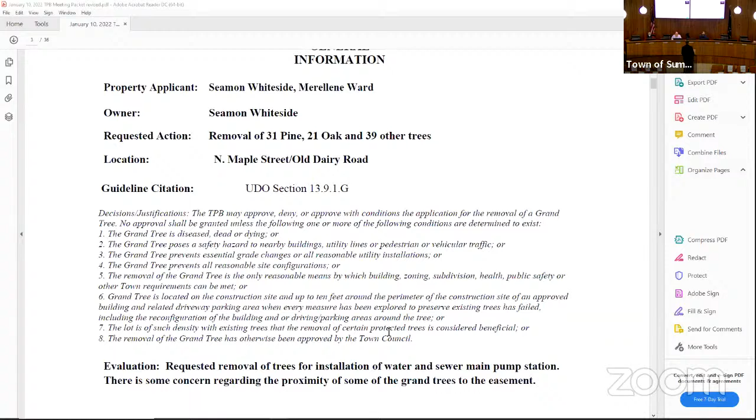Bill, you want to give your assessment on this project and what you've seen with the trees? Yes, I've worked with Chris a good little bit on it. I've been out in the field with him, and we graded all the grand trees that were in this easement. He did a real good job trying to save what he could, and he moved it around so he could miss some of them and take out trees that already had problems.

There's a few areas where we were getting into the drip line of a few of them, but he talked to y'all about that over there on Thursday. And as I understand it, it meets the PUD agreement that was signed. Yes, I looked to check that.

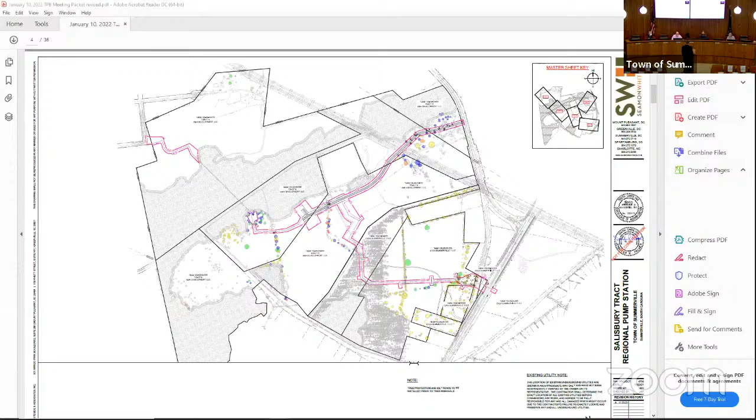We'll be asking for some type of mitigation efforts to protect the root system, in two places. Anywhere it's getting into the drip line of those trees, they're going to have to come up with a mitigation plan, and there were only two principal places. There was the one where the initial road comes in and bisects two clumps of live oak, and the second was where it was a stub for a sewer line.

We wanted some satisfaction on what the degree of disturbance was going to be, because it was pretty close to moving that live oak. We'll keep an eye on that as they put up tree protection, and they'll have to put all the tree protection up before they do any of this.

And just for discussion's sake, there is a portion of that project where there are pine trees that are part of a silviculture exemption. That's correct, yes. And they're going to bore all the way underneath that wetland, so they're not going to disturb any of those trees in the wetland.

So do you have further discussion, or are you content to? I'm pretty content with it all.

Is there a motion that we made on this, or we simply? No, we haven't made a motion yet, just discussion's sake. If anybody has a motion, I think we were out there, all four of us visited the site and spent a good bit of time looking at the project as a whole.

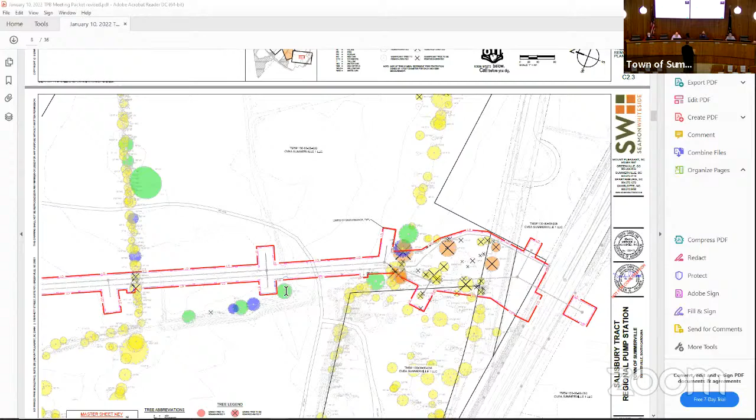That was easy. Fantastic. That's it. Thank you very much. Thank you.

All right, second new business, 201 West 9th North Street, Unit 312, removal of one pine and three gums. Is there anybody here representing that property?

All right, Bill, we all saw it, but you want to give your assessment? It was on that one real big pine tree. I guess the biggest thing we were looking at was where they were doing the plumbing work inside and had cut the slab up, and all the roots that were underneath the slab. The trees are healthy that are back there, but I guess that's their problem. They're too healthy and they're growing roots all the way underneath that slab.

You can see a lot of surface roots heading back towards the building, particularly with, and only really with, the sweet gum cluster, not with the big pine. Yeah, the roots did look like sweet gum roots inside there. You said they did or did not? They did look more like sweet gum roots, the ones that they had dug up.

But it wasn't anything cracking that we could see anywhere, where anything had cracked on the slab. I was concerned about the possibility of that tree that had already been removed, those root systems. Yeah, we don't know where those roots went. Didn't see any evidence of that one big pine tree back there, its roots growing towards the building. We didn't see any above ground roots growing back towards the building from it.

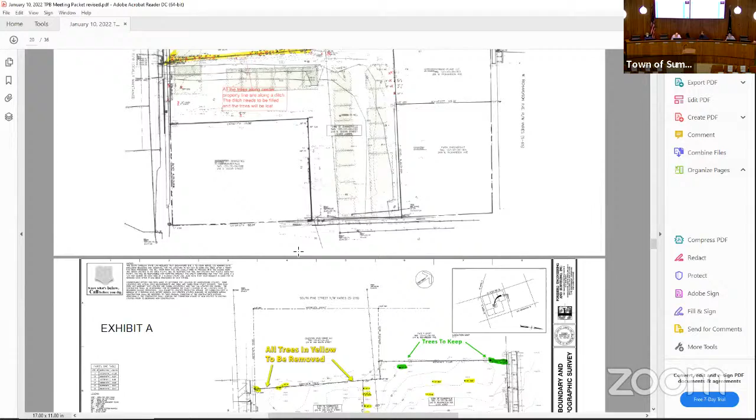So this is a more detailed site plan, shows all the trees in yellow to be removed, trees in green to keep, and then there's an area of potential soil gas caused by the former gas station that was here at 200 N. Richardson, and that's this area outlined in pink or red.

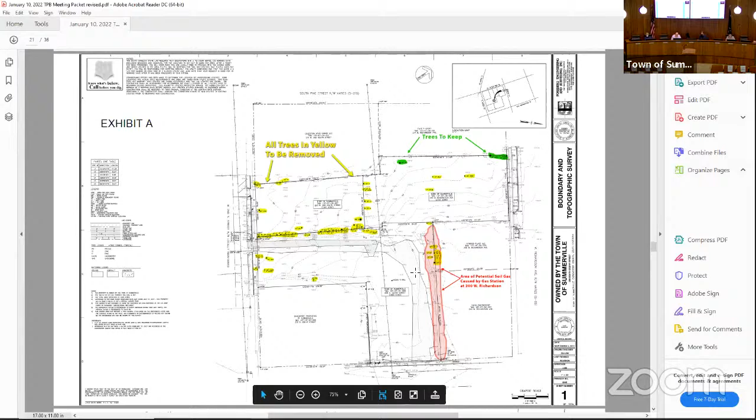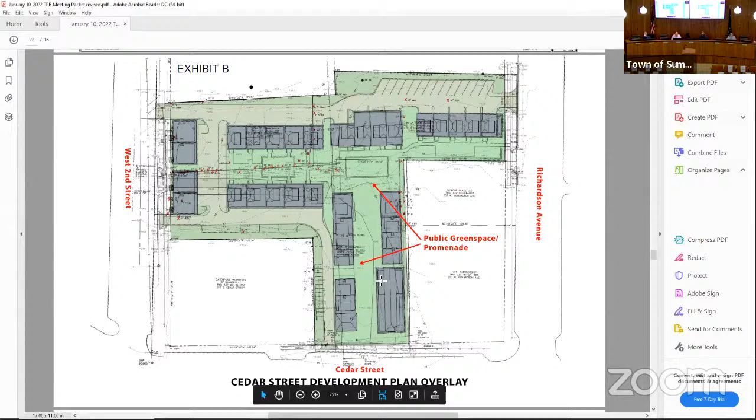They would have to answer that. I'm not sure they've gotten that far yet to have the exact surface. Is it grass, is it concrete? What is it? I'm just curious.

In the center of the promenade, Jeff Roberts assisting the town of Summerville's application. Respectfully, we're not the applicant, the town is, so we're just here to answer development questions such as this. The promenade is going to be pavers at the center. The one going horizontally will be a vegetated park, with our landscape architect providing plantings in multi-tier levels, but the promenade, similar to Short Central, will be paver. Okay, that's what I wanted to know. It'll all be perfect.

I just wondered about fire trucks driving over it. Fire trucks going over the surface?

As you said, this area here will be more of an actual park space through here. You've got an existing ditch there that will have to be filled, and the stormwater will work through that, but those trees along that ditch line obviously won't survive if the ditch is filled.

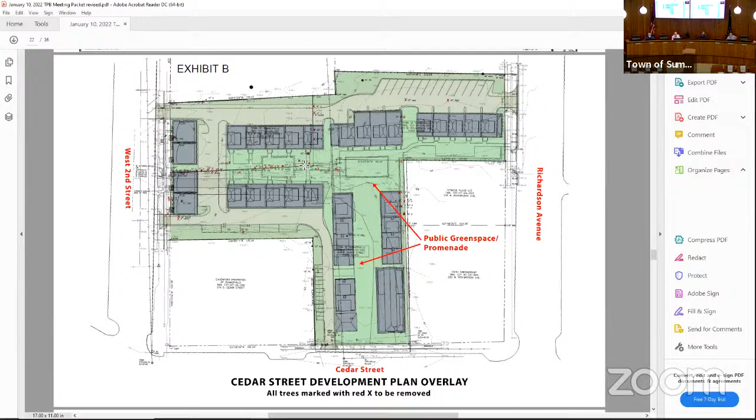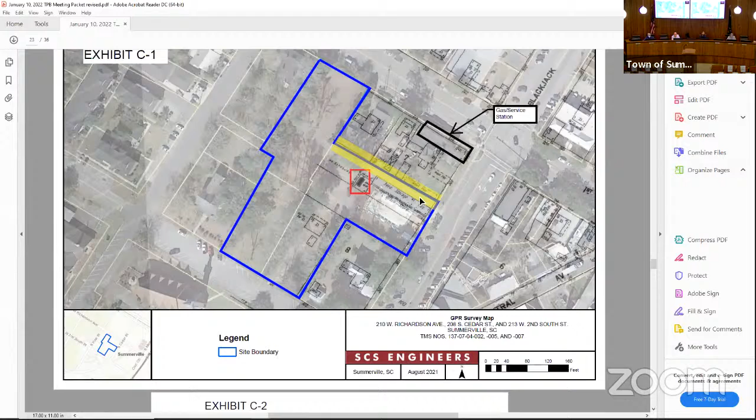This is showing the potential soil gas area. This is where the previous gas station was, at the corner of Richardson and Cedar, which at the time was known as Blackjack and First. SCS engineers did an initial survey and investigation, and found potential vapor intrusion in this area, which means the soils would need to be replaced. If you have additional questions about that, I'm sure that can be answered.

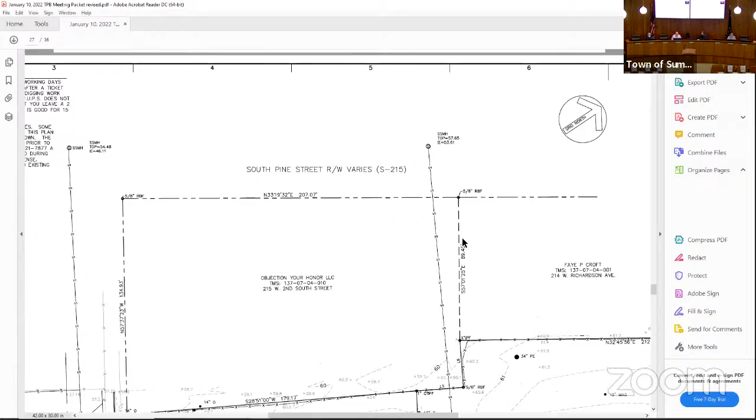Would you explain vapor intrusion? I don't know, I'm assuming there was a gas station at one time with tanks in the ground, and there's probably a plume underground. It just means the tanks most likely leaked at some point, so the soil is contaminated and has to be cleaned up before anything can be done, which means it basically has to be all excavated and replaced with soil that's not contaminated. This is done with a lot of former gas station sites, unfortunately, because previously the tanks weren't made of materials we now encase them with, but back then that wasn't done.

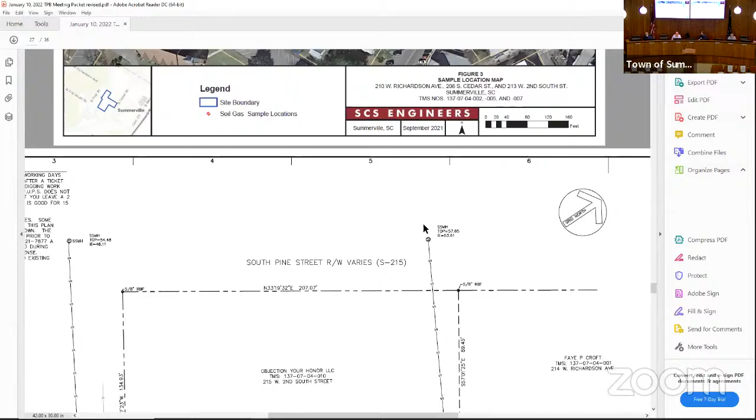Jesse, is the red square showing a tank still in the ground on that aerial picture? Is that what that is? These are soil gas sample location areas. I can assist in answering that - that was another tank from the late 1800s that we found with ground penetrating radar. That tank probably also leaked too, because the ones made subsequently were better than that tank. We can't tell if that tank's still in the ground or not, but if it is, it's got to come out, and we suspect whatever was in that tank could have leaked as well. That tank is from sometime in the 1800s.

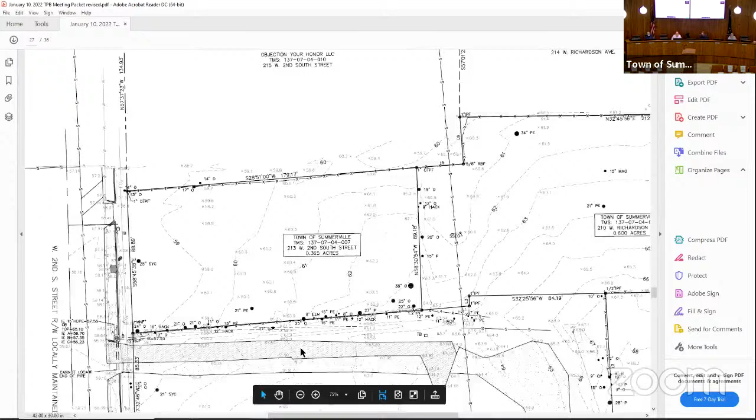This is just the overall survey of the site, which y'all have seen, but just to show the grade change they're having to work with. I believe it's about a 7-8 foot grade difference throughout the site - you've got 67 feet up here, 66 feet up here, and it goes all the way down to 59 feet over here at West 2nd South Street. That's another issue they're having to deal with that makes saving trees in the middle of the site difficult when you're dealing with that type of grade change. Most of us know we don't usually have that much grade change on a site in Summerville. Generally it's a couple feet, but 8 feet is a pretty significant difference in the low country.

Is the sidewalk level going to change? No, the sidewalk level probably won't change. However, with stormwater, they have to keep it all on site. Right now this one goes this way and this one goes this way, and they're going to have to all be routed to the same spot, to the same low point, to work properly. So it creates issues with making sure it all flows in the correct direction and not onto adjacent properties. It's all gonna head down towards the street - stormwater will be handled on site, but it'll eventually go out to, I'm assuming, the low point over here.

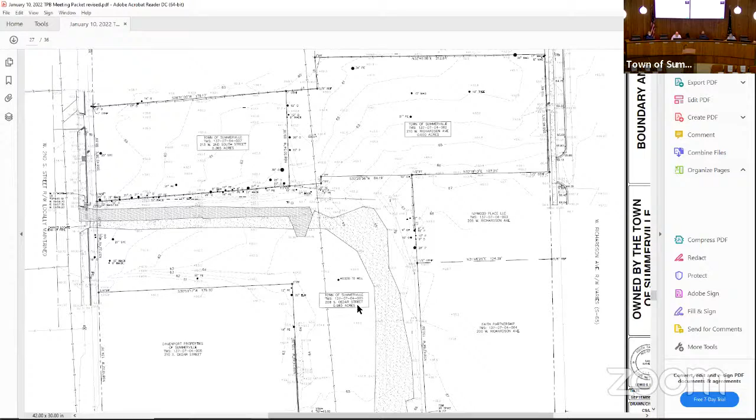Just curious, so on the page where you're showing the red area, is that dirt going to have to be removed? Excavated and removed, exhibit A? I guess the yellow and the red, yeah.

It's possible we need further testing, but we can't let a vapor plume be underneath the building. In that other page, SCS Engineers has a further proposal, but we've already gone extremely far on this project from a due diligence perspective with the town, and we definitely want to get it right. We have the top environmental engineer in the state looking at the project, working with us on all other stuff. It's possible we don't know how much has to get removed until we do additional test boring, but it's quite possible. We just can't leave vapor intrusion there for future homeowners.

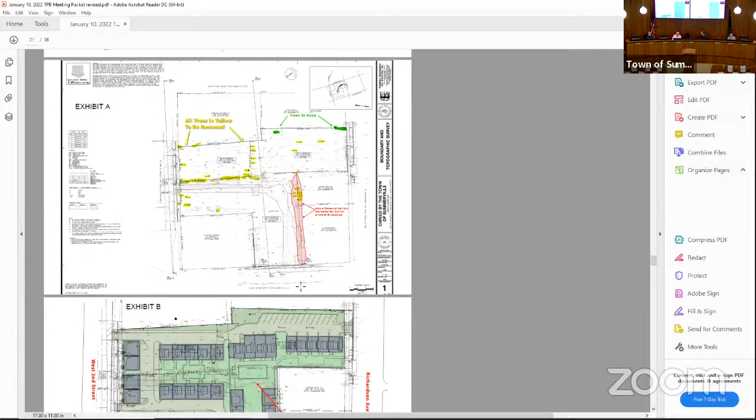For the board, the questions we had out in the field the other day, I think they've been answered by Jesse. The pine trees are at a point so close to the building that they wouldn't survive or have to come down anyway, going into the property. A couple of trees I asked about on Second Street, it appears the building is going to be pretty much in that footprint or very close to it, even though the elevation may not change. So one of the biggest things to me is protection of that big live oak adjacent to the property where the driveways could be coming. That's just a mitigation plan that'll have to be worked out.

You're right. Is that a fair statement for the board members? Yes, yes, yes. Okay, is there any more discussion or any more information? Do we have a motion?

I'll make a motion that we approve what we were requested to approve, and the trees obviously can't stay, but add particular attention to the root zone of the live oak on the adjacent property, to be dealt with as comprehensively as possible. I move that we approve the project as is with respect to the tree removal, with special attention paid to the passage of the driveway across the root zone of the neighbor's live oak. I'll second it.

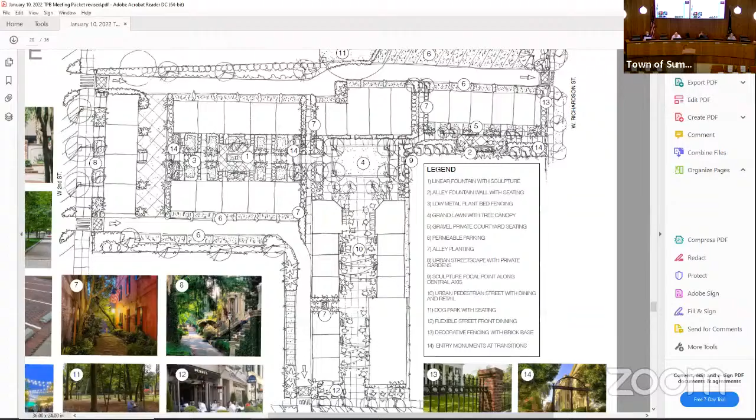You got a question? No real question. The application, the exhibit in the application where we had the arrows and everything, that's what got approved by the town, correct? Yes. Okay, yes.

And we will work hand in glove to get that live oak on the neighbor's property the royal treatment, we'll work with you. You just need to get an arborist to come in there. Oh, yeah, yeah, yeah. Give a mitigation plan. We'll work hand in glove, we got it covered. That tree will thrive. I already discussed it with our civil engineer. All right, sounds good. Thank you. Appreciate it. Thank you, appreciate it.

Thanks, all right, Jesse. All right, the last one's 110 Carroll Court, removal of 4 pine trees.

So on the property itself, this is going to be a guest house. We have a pool that was filled in on the right side of the property, and if you've been out there, you see it was a giant hump that was out there. We're looking to redo a pool out there in the coming 2 years. This is the spot on the property that, between my son-in-law who works for Pulte Homes, he's the one heading the project, this is the best spot. We had a dead pine that's pretty much already back there. And the rest of it's pretty much that. We love our property the way it is, but this is just the best feasible spot for this project. Hey, let's look at the diagram.

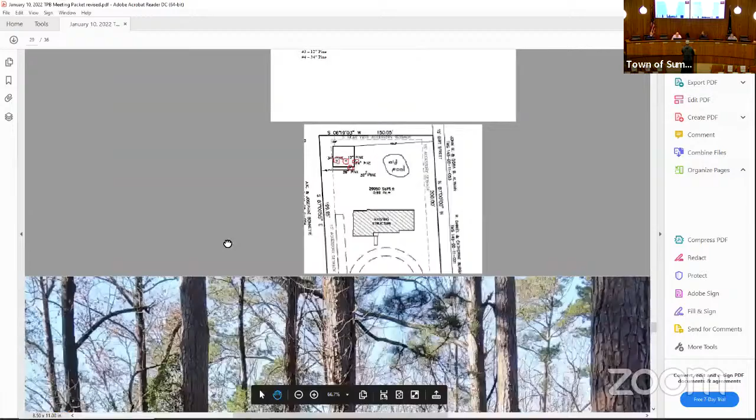Correct me if I'm wrong, but the dotted line that runs in the back, is that the property line? Hold on, let me zoom back in and out. Property line is this dark black line. So the 5 feet, that's the easement off that line, correct? Yeah, that's your rear setback. So I would think that would work.

Any more discussion or a motion? I think we're good. I'll make a motion that we permit the 3 central trees of discussion, permit their removal, and ask that the 34-inch tree, whatever number it is, be saved. And if in the future it becomes an engineering impossibility to keep that tree on site, both for its own sake or for the building's sake, we can visit again and discuss it more.

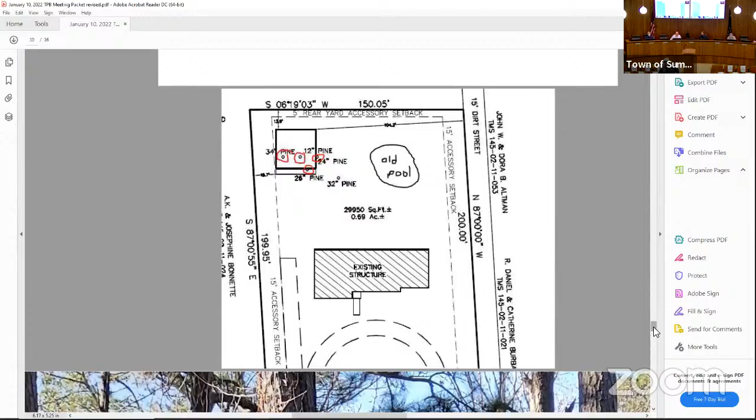Thank you. Good luck with your project. Hey, thank you guys.

Is there any miscellaneous discussion items? Nothing under miscellaneous, unless you know anybody who might be interested in serving on the committee with you, please tell them to apply. There's been none so far. We still have no one who's applied, and we certainly need another member.

I just need to do some investigation for you, sir. Okay, well we'll speak later about that after we return, not today but tomorrow. All right, any more miscellaneous other than trying to find someone to help serve on the board?